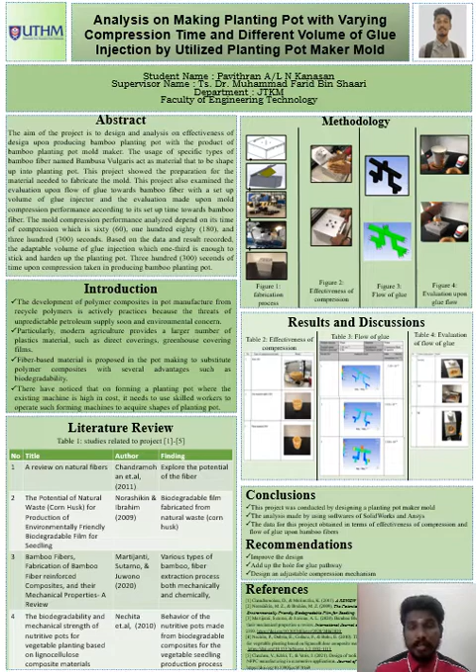Today I'm here to present my poster titled Analysis on Making Planting Pot with Varying Compression Time with Different Volume of Glue Injection by Utilized Planting Pot Maker Mold. My poster contains my abstract, introduction and literature review, methodology, results and discussion, conclusion, and recommendation with the references. The content of the poster is divided into several parts to make it clearly visualized for our panels.

The content starts with the abstract, where we know nowadays plastic manufactured from non-renewable petroleum sources is rapidly being used in agriculture, which causes an environmental risk. In horticultural operations, it tends to create a large volume of plastic waste from transplanting pots that are rarely recycled. Therefore, the aim of the project is to design and analysis on the effectiveness of design upon a bamboo planting pot, with the end product of a bamboo planting pot mold maker.

The compression molding process is chosen to form the bamboo planting pot. A specific type of bamboo fiber named Bambusa vulgaris acts as the material to be shaped as a planting pot. This project also showed the preparation of the material needed to fabricate the mold and the involvement of machining processes to indicate the steps of making the mold.

This project also examined the flow of the glue into the bamboo fiber with a set volume of the glue injector, and evaluated mold compression performance. The set volumes are 1/3, half and full of the glue injector, while mold compression depends on its compression time, which is 60 seconds, 180 seconds and 300 seconds.

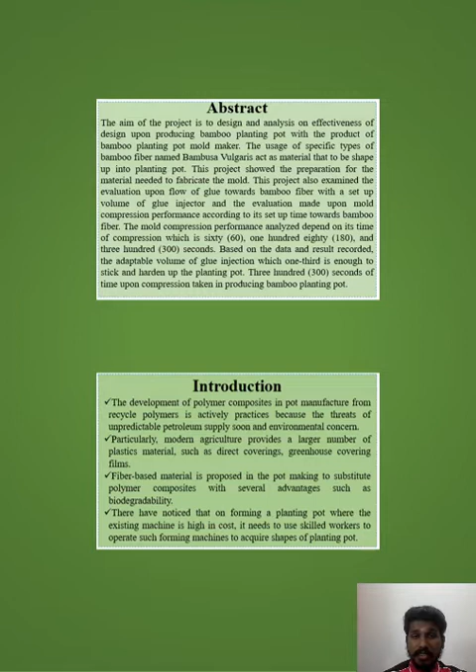We also noticed that for forming a planting pot, the existing machine is high in cost and it needs highly skilled workers to operate such forming machines to acquire the shapes of the planting pot.

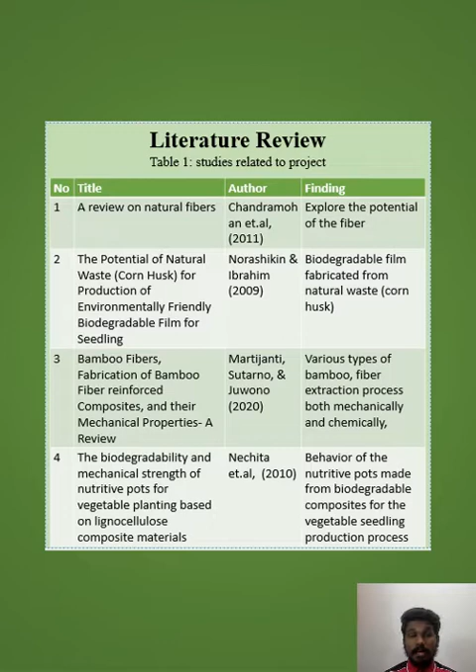It continues with the literature review, where studies made it easier to get my project successful. It started with the fibers used as feed material for the mold, then the potential of natural waste, which is corn husk used as biodegradable film for seedlings, and also bamboo fiber, covering its fabrication, the way of extraction and its properties, and even the biodegradability and mechanical strength of nutritive pots, which are another type of biodegradable planting pot.

Continuing with the methodology, I used four kinds of methods, starting with the fabrication process. It started with three proposed designs, and one design was selected as shown in figure 1, followed by simulations in SolidWorks to know the achievability of the design. After that, the material for the mold was prepared, starting with lost foam casting, by cutting the styrofoam into the desired shape.

After making the material, it continued with the machining process, which uses CNC milling, conventional milling and a conventional lathe to get the exact dimensions of the mold. After getting the parts of the mold, the assembly was done with the help of screw-type parts.

Then it continues with the method of effectiveness of compression, where the bamboo is placed in the mold cavity and manually pressured according to the different times that have been set up, which are 60 seconds, 180 seconds and 300 seconds.

Then there were also simulations done in software named ANSYS to know the flow of the glue with different pathway diameter designs. The pathway hole designs that have been set up are 3 millimeter, 6 millimeter and 10 millimeter.

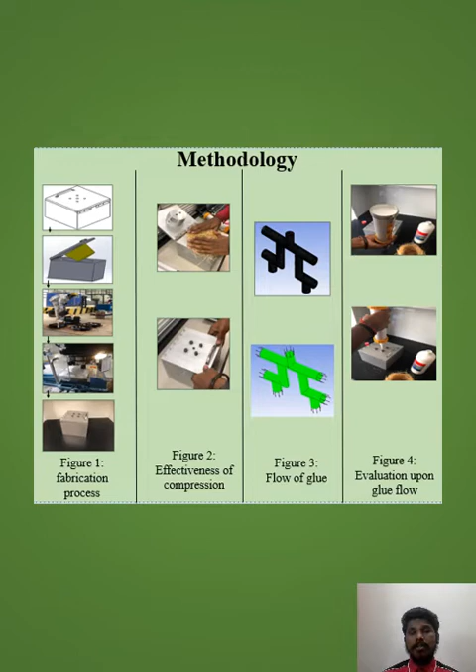The first test conducted was the effectiveness of compression upon bamboo fiber with the help of the planting pot mold maker. The effectiveness of compression is measured according to time, set to 60 seconds, 180 seconds and 300 seconds. From table 2, we observe that image number 1 is weaker in planting pot structure compared to images number 2 and 3, while image number 2 is able to get the shape of the planting pot but faces difficulties in mid compaction of bamboo fiber into a planting pot.

If you observe image number 3, it is able to acquire a good structure and a high level of compaction of the bamboo fiber compared to images number 1 and 2.

Therefore, the analysis made shows that more compression time helps to get good quality structure and compaction of bamboo fiber in making a good planting pot. It can be concluded that 300 seconds, which is the highest compression time tested, helps to get a better structure of the planting pot.

Image number 2 and number 3 are in good structure, but number 3 is taken as the better structure among the 3 images. It continues with the next test, conducted with the software named ANSYS simulation, to get to know the velocity streamline of the flow of the glue in the designated pathway,

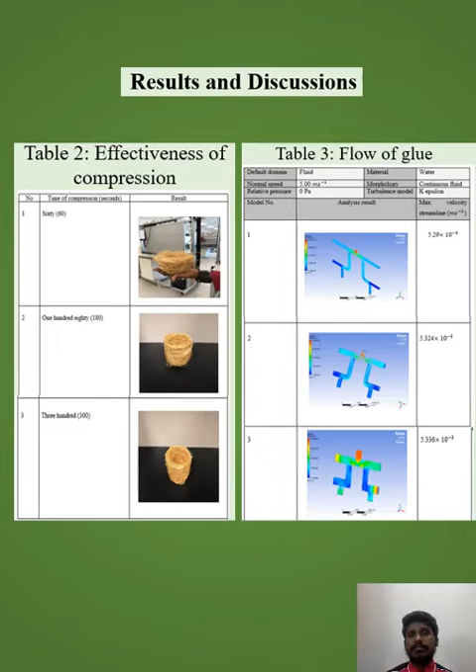And then here it continues with table 4, the result of evaluation of flow of glue, where the flow of glue is according to its volume fill. The result is observed in terms of effectiveness in spread of glue flow according to the designed pathway with the set-up volume of glue injector.

The observation refers to the result in the form of images, where image number 1 shows the spread of glue is low compared to image number 2 and number 3. Image number 3 indicates the most flow of glue in the bamboo planting pot compared to images 1 and 2. In these situations, the volume of glue injector depends on the size of the planting pot.

The more volume of glue filled up, the more glue is trapped below inside the mold cavity, which makes it difficult to take out the planting pot from the mold cavity after the injection of glue.

Therefore, considering all the possibilities, the analysis was made according to an adequate volume of glue spread around the planting pot, where image number 1 is more suitable to coat the planting pot enough, with the volume of glue injection taken as 1/3 of the glue injector, compared to images number 2 and 3.

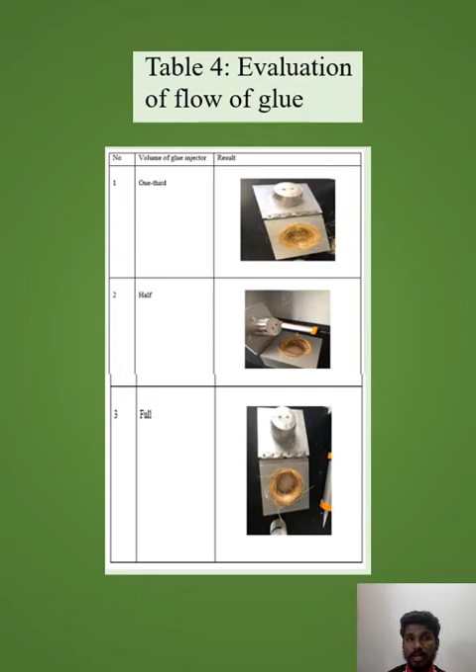It continues with the conclusion. This project was conducted by designing a planting pot maker mold and then fabricating it to shape up the planting pot manually with the forming process named compression molding. The analysis was made with the help of SolidWorks and ANSYS software, where the software helps to visualize and simulate the mechanism of the project and the flow of glue upon the designed pathway.

The data for the project were obtained in terms of effectiveness by injecting different volumes of glue inside the designated pathway of the compression mold. Another test was carried out to know the effectiveness of the compression mechanism on bamboo fibers according to the time set up. The data collected from the evaluation of spread of glue on 3 samples of bamboo planting pot show significant differences in the flow of glue towards the feed material.

As per the result, the accurate volume of glue to be filled is 1/3 of the glue injector, to get the correct actual spread of glue upon the planting pot, while the result for effectiveness of compression shows the longer the compression time, the nicer the structure of the planting pot. So as per analysis, the most adept compression time to make the planting pot is 300 seconds.

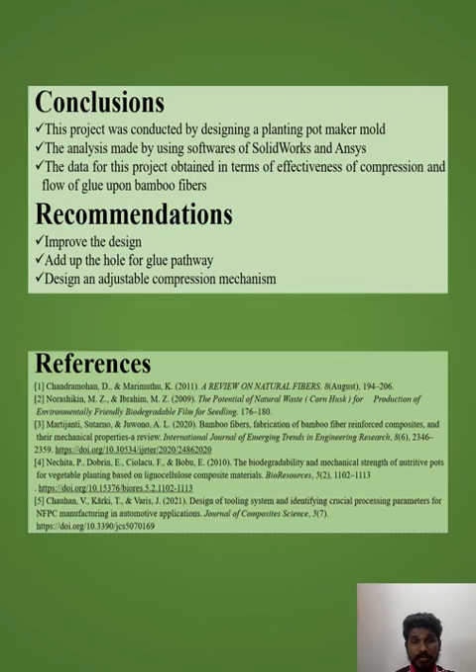It continues with the references, and here I have attached 5 references that mainly helped the study in making the planting pot.